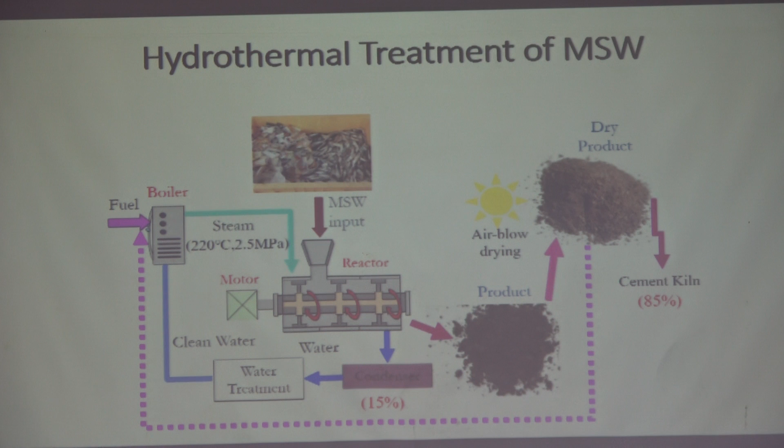So he invited me to go there, and I went with him to visit the place. I'll show you the video of it - it's very nice.

This is for municipal solid waste, 12 cubic meters and so on. You can see this one here.

Watch - this is the one in Indonesia. See, they have a big turbine-like structure. The lorry comes and goes directly from the truck into the machine, with no landfill needed.

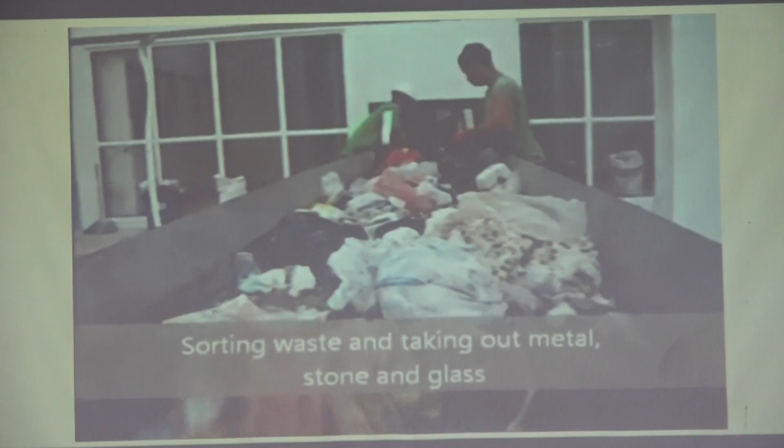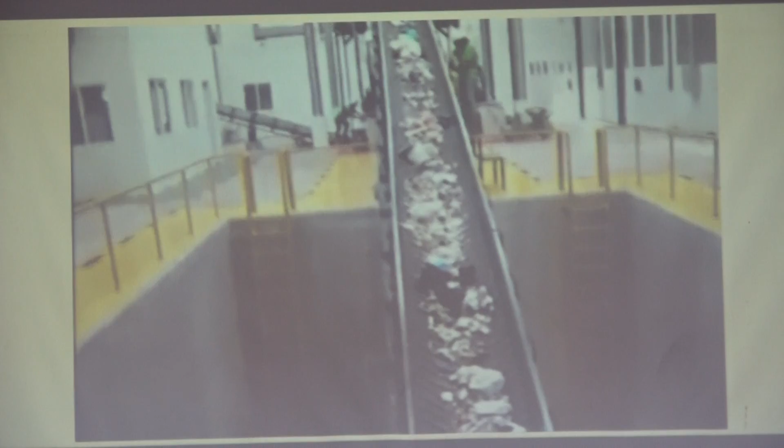Some sorting takes place, especially for metals. They also have a magnet to pull out any metal. You see, the factory is so clean - you don't see garbage all over the place. It's very clean.

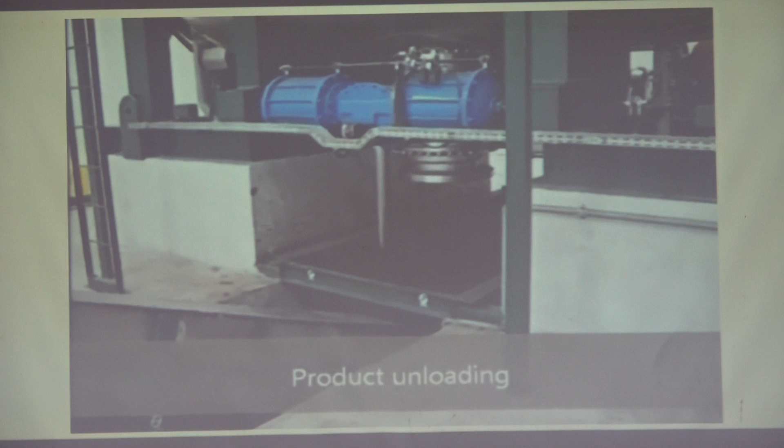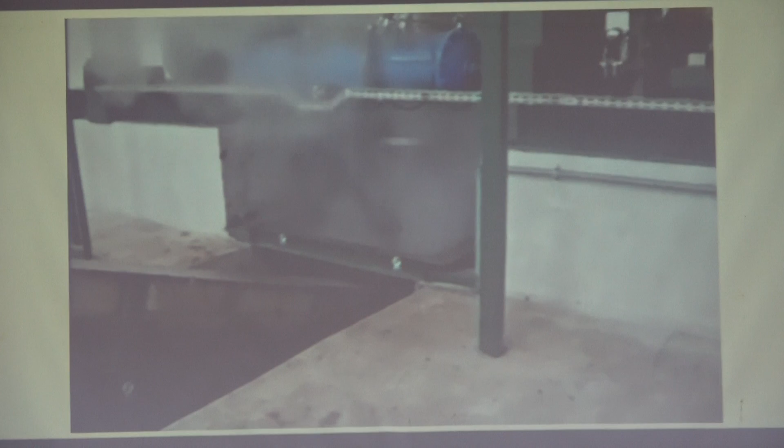The Pangkor plant is only 10 tons, built for 80 million ringgit, and then it's a white elephant. This one here is 100 tons.

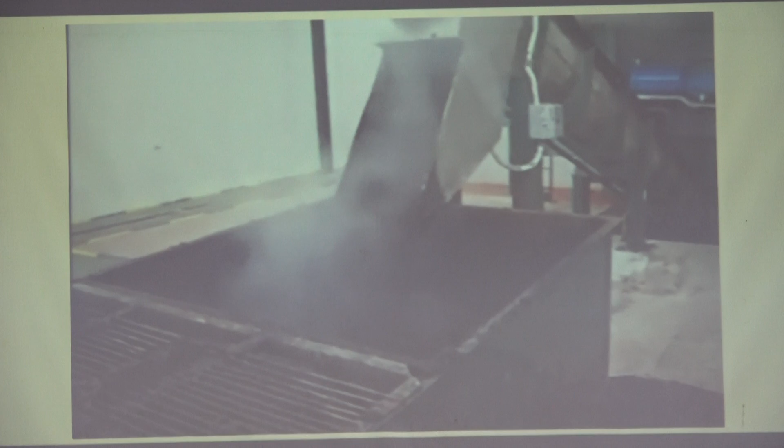See, when you let it go, it becomes a black paste like that, and the smoke just smells like coffee. This is the final product, and it's actually combustible - it can be burned.

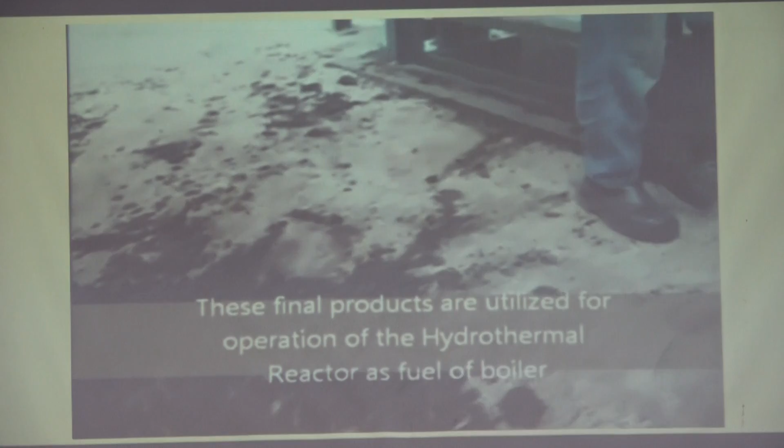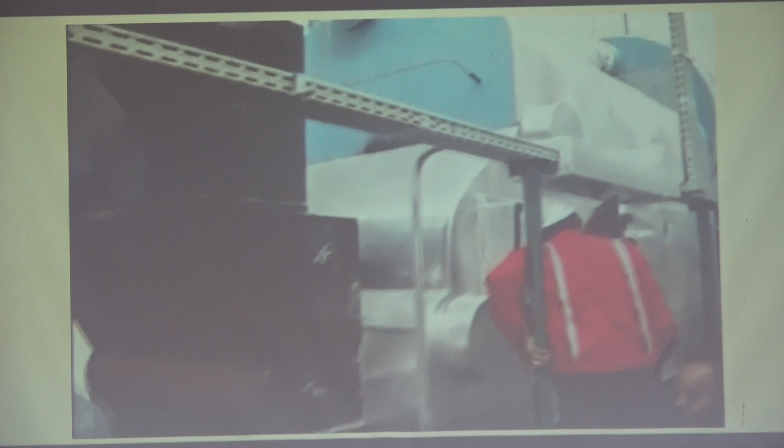Nothing, it's water. It is actually vapor. There's some water. So that is, see, a simple...

The cost of that whole thing is only about 4 million USD, which is 16 million ringgit. So imagine for 100 tons, you only need about 16 to 20 million ringgit. But the other one, just for 10, it is 80.

And then, a lot of working parts, in the earlier incinerator. But the good thing about this technology is that it can also process not only municipal solid waste, it can also process animal manure, that means chicken droppings, right?

Then sewage sludge, all the things from your toilet, everything can go inside. And also the empty fruit bunch, the EFBs from oil palm, the fruit. After you take the fruits, you can also process these. Indonesia and here Malaysia, we have a lot of oil palm plantations, right? Isn't it? So the same plant can actually process all of them.

So morning you can process the MSW, afternoon you can process the chicken manure, or the EFBs and so on. So many. So what is the good thing for Manjung? Why this thing? Because the chicken farm, all they got to do is send all the chicken manure, and you process it.

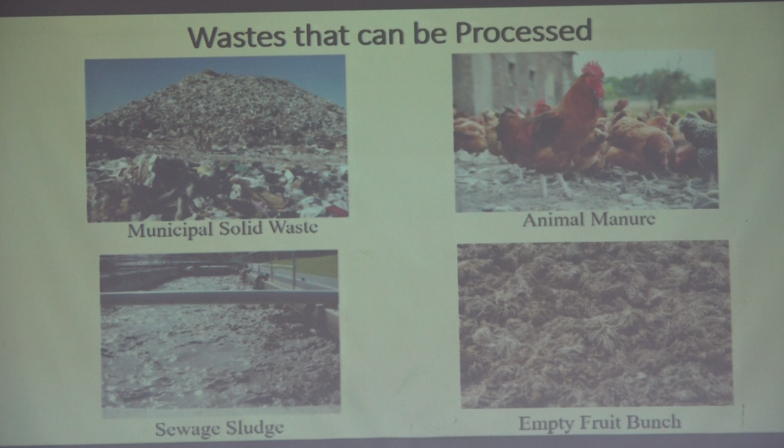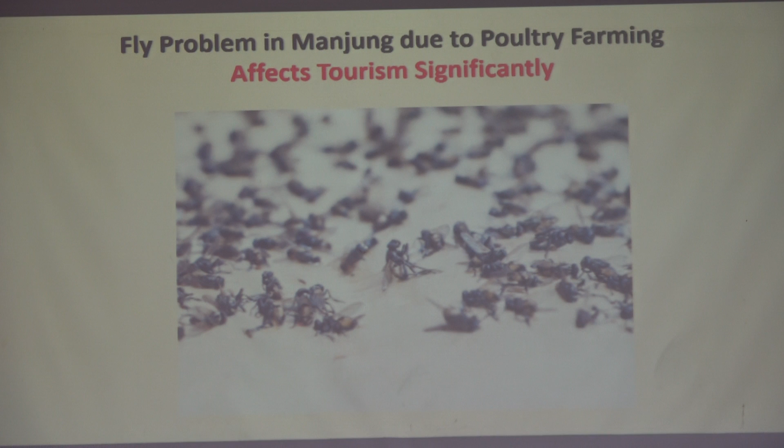So you see, it has a lot of benefits. And this one also solved the fly problem. The moment you solve the chicken manure problem through this, the fly problem is also solved, because the flies like to go and lay their eggs on the chicken droppings.

So waste to fertilizer, let's say you use chicken manure, you put all the manure into the system. It will have a high water content initially, but after the process, you are interested in the water component, because that's where the fertilizer is - the nitrogen, phosphorus, and kalium.

So you get that here. Then the dry solid part of it, you use to power the entire thing again. We can burn this to get the electricity to run the entire thing again. So it is self-sustaining - that means you don't need to buy power from any electricity company.

In fact, they were telling me if you do this beside a power plant, like TNB's power plant - Manjung has one TNB power plant - you take the steam from them, because they will have a lot of steam. You just push part of the steam here, then out of the products you produce, you give them to power, to power.

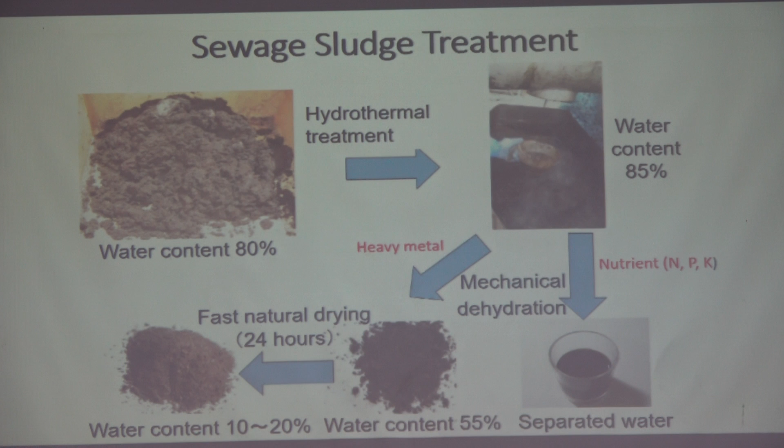So it's like a barter - okay, you give us the steam, we give you part of the product that can be used for the boiler. Get it? So these are some of the benefits.

But this, the professor told me this, and I find it myself also difficult to believe - when they produce this fertilizer, in Japan they can sell the fertilizer for 36,000 USD per ton. So I thought it was a lot, but he says that's the price they sell it for.

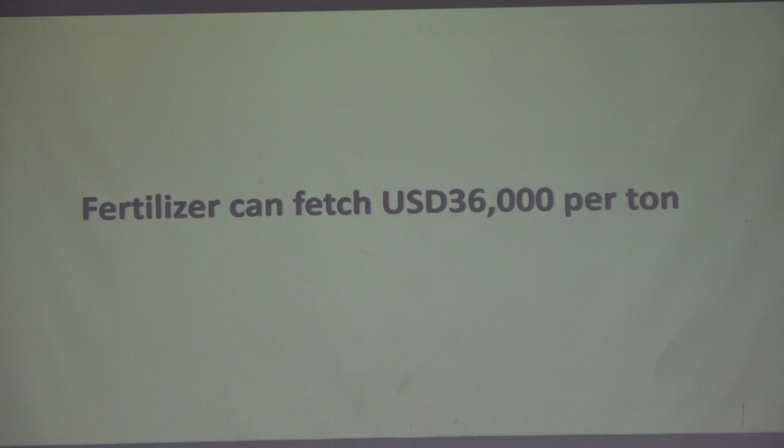China and Japan have also got another machine to clear up present landfills. In present landfills, the organic part has already turned into soil, but you have the plastics—some of the plastics will be there for years, like slippers and tires. So this machine will dig up the whole thing, go through it, clean up, sieve the earth, and then feed it into this system.

It's still profitable, even though the organic part is no longer there. They can bring the machine, clear up the entire land, and give the land back to the government.

So look at the emission data after you go through this process. That's the Japanese standard—willing to accept up to 700, I forgot the exact figure, for hydrogen chloride and those things you don't want in the air. But after going through this process, you see how low the emission numbers are. That's why this process is highly recommended, because ultimately it solves a lot of these hazardous material issues.

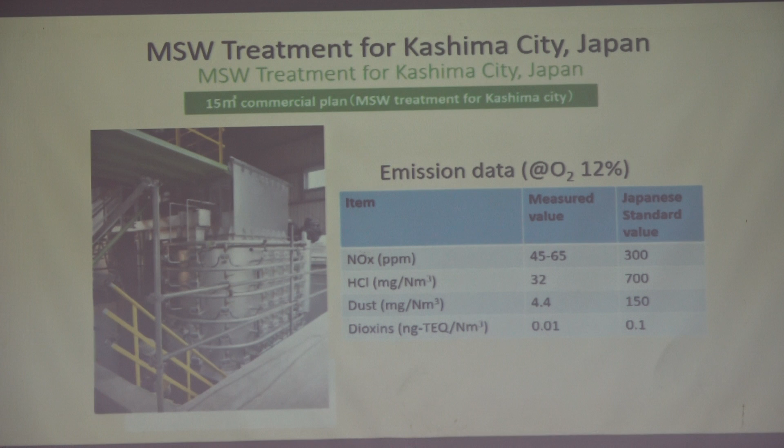I think it's my phone. Sorry, it's inside the bag, but it's ringing.

So the benefits are: almost all waste can be processed without even sorting. The process is scalable from as low as 20 tons, or even 10 tons per day, up to hundreds of tons per day, since they just build the reactor to the size you need. The process is basically odorless—when it releases, there's a smell, like coffee, but there's no real odor problem, and it creates no noise pollution.

And the product has economic value, hence it's a profitable business venture. I tell you, some of you are interested in this—it is actually highly profitable.

When I was interviewing some of these waste management workers, you'd see them in the lorries—after some time they just stop doing it once they see the value of things they can get. They start collecting the recyclable items and make much more money. I'll show you the numbers, you'll be surprised—many of them stop after a while once they see, hey, this is lucrative.

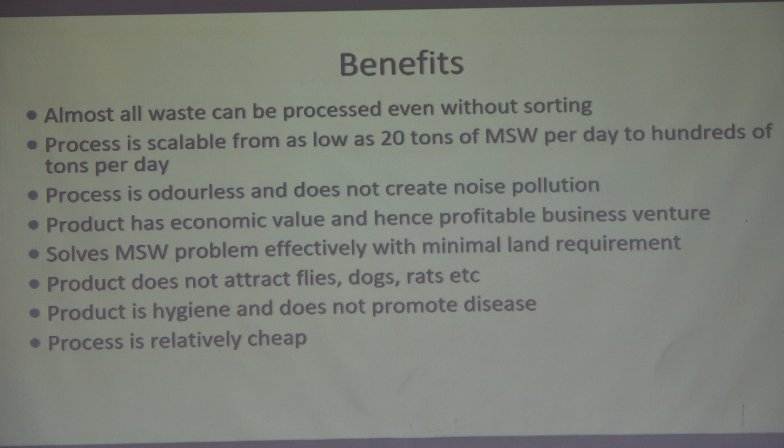Even making boilers isn't a big deal—Malaysia has had this boiler technology for a long time because of the palm oil industry. All palm oil plantations have this boiler.

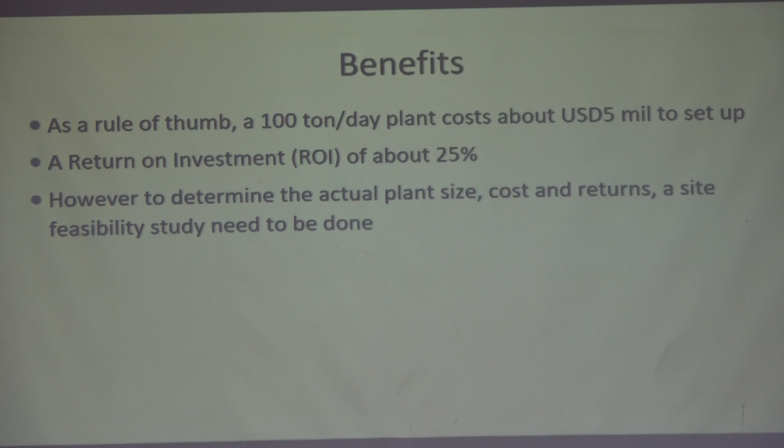I was also comparing the Japanese and German systems. The German company says they will bring even the money—you don't need to bring anything. They'll bring the technology and the money, but all they want from you is a guarantee of the MSW.

The government must guarantee that the MSW collected from households will be given to them, and in return they're willing to share part of the revenue with the government—making it a totally profitable venture for the Germans.

But the Germans are very clever—they set the price very, very high, as though they bring so much money in, so that afterward, for you to retract or walk away becomes difficult.

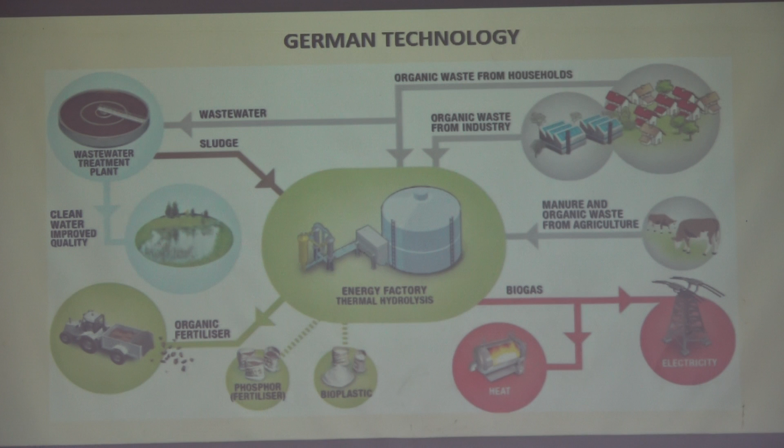They are willing to give it with no tipping fee, nothing—you don't have to give them anything. They just want a small plot of land to operate on, and that's it, plus a guarantee of the garbage supply. That's the only thing they want.